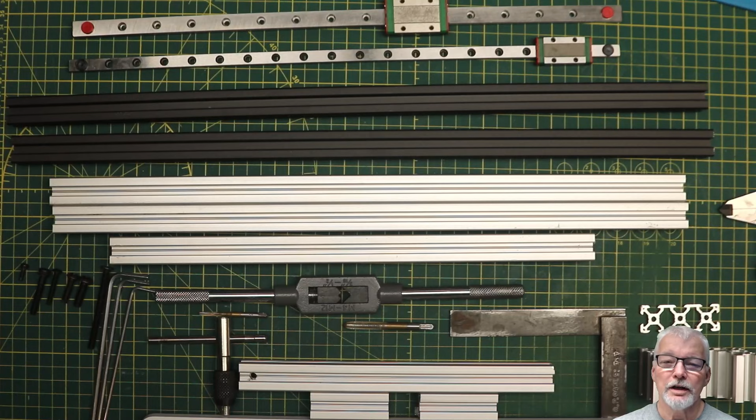So without further ado, let's switch to the bench and have a look at some of the components and some of the tools we're going to need to get that done. What we have up at the top here is an MGN 12 linear rail. We have an MGN 9 linear rail. The MGN 12s, these ones here, are used for the x-axis only. Everywhere else on the z and the y-axis uses MGN 9s.

Now that's great, and the reason they picked MGN 9s is when you put them on a 2020 extrusion with the carriage, it does not exceed the thickness of the extrusion, which means that you can put covers onto the outside of the printer and the rails will not rub against them. If you use MGN 12s, it would. All of the Voron 3D printed parts are designed around using MGN 9s.

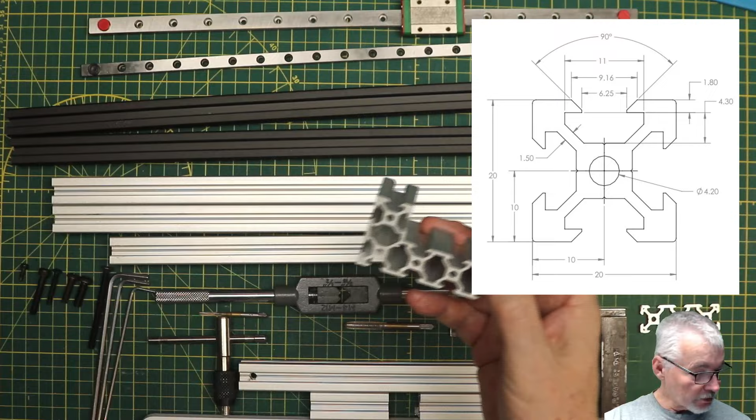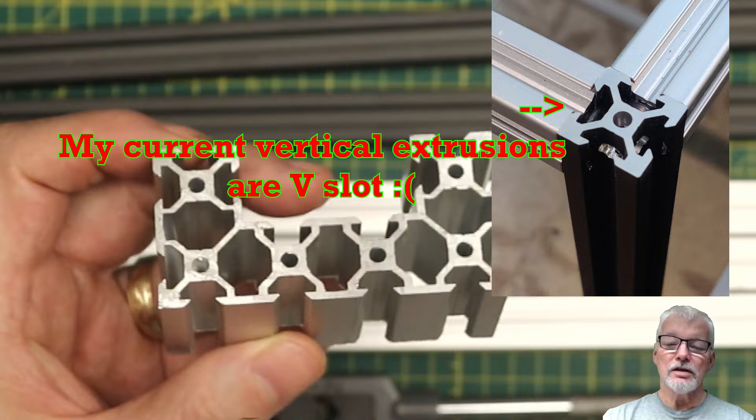Now I've discovered that my vertical rails are actually V rails, and if I show you an example here of what a V rail looks like, you can see here that there are slopes. There's 45. If you go down on that one and back up on this one, it's a 90-degree slope, and the width at the top of this slope is actually 9.2 millimeters, slightly wider than what the MGN 9 rail is.

Now this is an 80 by 40 C section of extrusion. I've used these in the past for my CNC machine. Can't use the MGN 9s easily on the V sections. Now some people have used 3D printed inserts to sit under there, which takes up the V shape, and I might try that. I'm not completely against getting some proper extrusions.

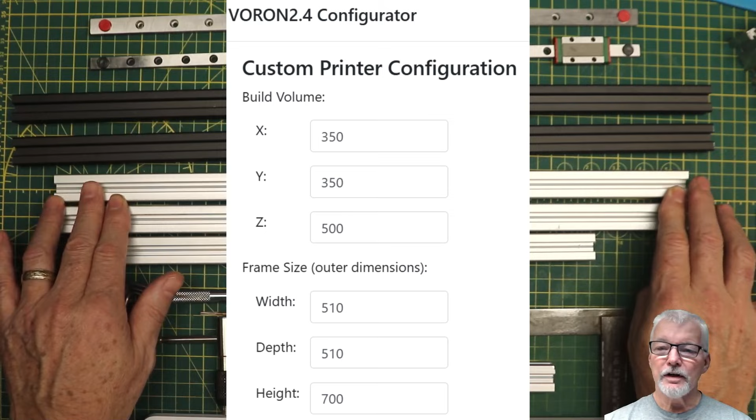So the first thing you've got to do is decide what size frame you're going to work with, and that's where you go through the configurator. I showed you the configurator in the previous video. One of the things that comes out of it is the length of each of the sections you need. Now I've already cut all the pieces from the scraps that I had, but I wanted to go through some of the important aspects of what you've got to do when you cut these, and also what can be different about different extrusions.

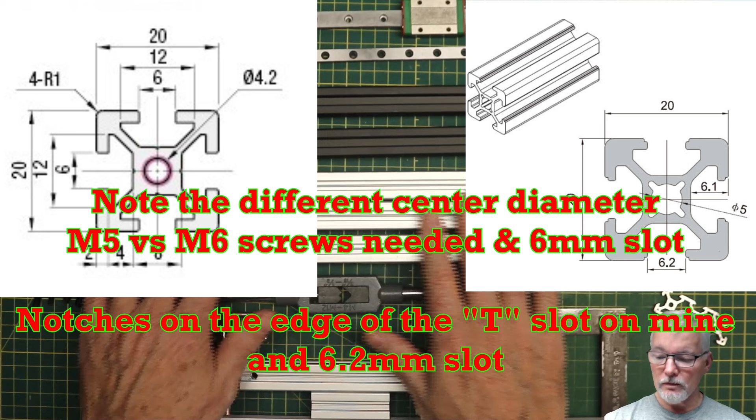None of the ones I have here are Misumi extrusions. There you go, I remember the name. They're close, they're all 20 by 20 T-slot extrusions, but the Misumi ones have a slightly different profile about them.

Now if we go back to these other extrusions, here's the V wheel one, and you can see here the gap between them is 6.25. That's no big deal because the T-nuts that go in will go well into the slot and they'll still clamp up well. But the gap across the top, sorry, I said 9.2 before, I meant 9.16. Your linear rail is 9 millimeters wide, so it's going to be sitting just a fraction into there, and it's going to make it very difficult to stop it from twisting into aligning with one of those slopes.

So by 3D printing something that could insert in there, in my case, I might be able to avoid that, and it's worth giving it a shot because I've already got them. Anyway, so that's a V slot that's used for a lot of the Chinese import 3D printers. It's used a lot in some of the lower cost CNC machines too. In fact, the two that I built years ago both use V wheels. The extrusions are much bigger, but they're still based on the 2020 format.

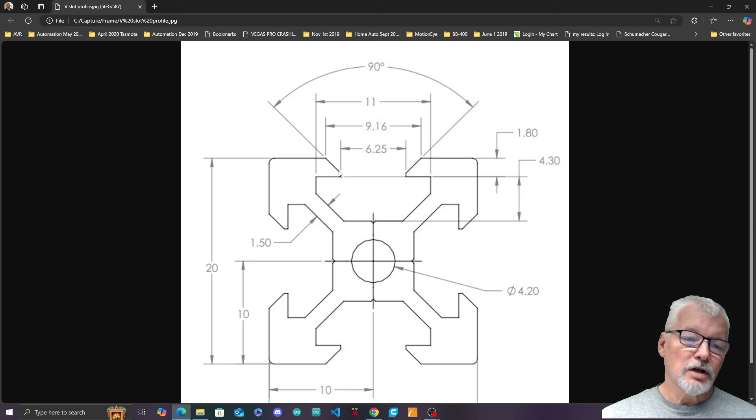So like I showed you before with that 8040 C section, my big 1.5 meter by 1.5 meter CNC actually uses that C section for its axis. So yeah, this is why the worst kind of extrusion you can use is this V wheel kind. Now, one of the other ones that is very common, if you get standard extrusions, is this one.

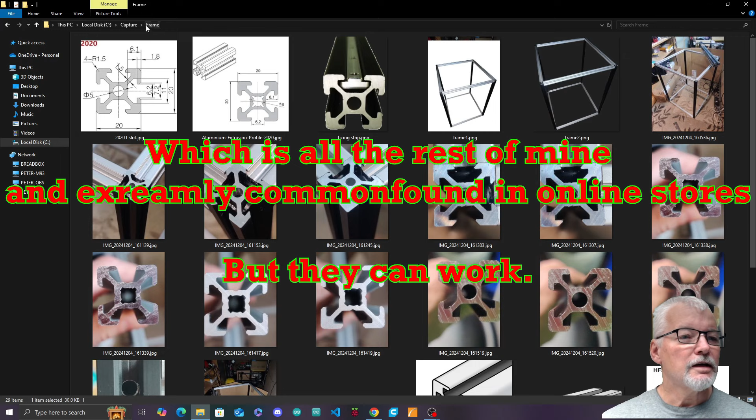And if you look at this one, you'll see that it's almost perfect, almost, but the gap in between the two is 6.2 millimeters. As I mentioned before, the gap is actually okay at 6.2, but there's a little half millimeter by half millimeter notch. Not sure why it's there, but it is on each side of the slots. So that means it's 7.2.

So your 9 millimeter rail will go in there, but it'll only have 1 millimeter on either side. As long as you align it properly, that will be perfectly adequate and clamped down. The other thing you have to notice is that the internal hole diameter is actually 5 millimeters instead of 4.2. So you can't use that for an M5 screw. You'll have to go up to an M6 screw. And that's perfectly fine too. That's a very, very trivial variation in this situation.

Now, I have a lot of this extrusion. In fact, all of the horizontal frames on my build are going to be made out of these, and the flying gantry is also going to be made out of these. So I'll make slight adjustments for the holes by tapping them bigger. When it comes to the flying gantry, it really doesn't make any difference.

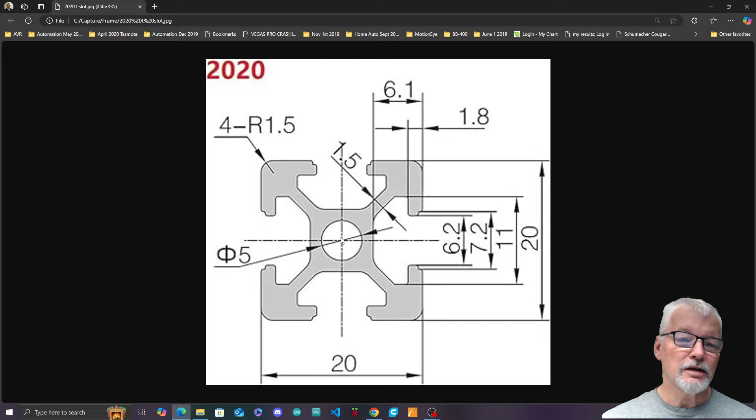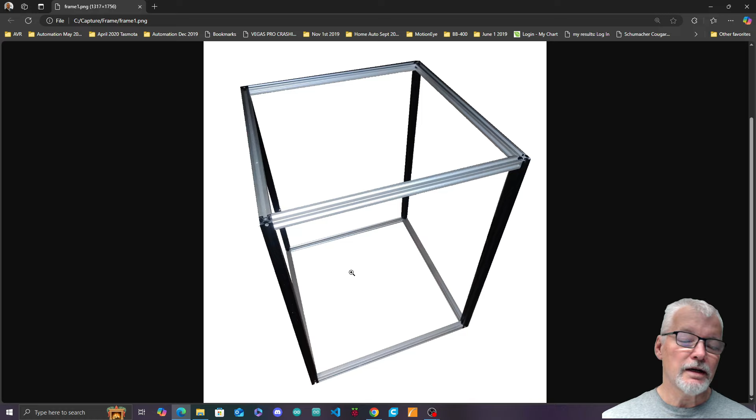These top ones, you don't actually put any linear rails on them at all, nor the bottom ones. You only put T-nuts in and attach them. So it really makes no difference there. The only real difference that would be made is on the flying gantry, where you will have the linear rails for the X and Y fastened. On this, you're going to have linear rails fastened on the inside edges of these vertical black rails.

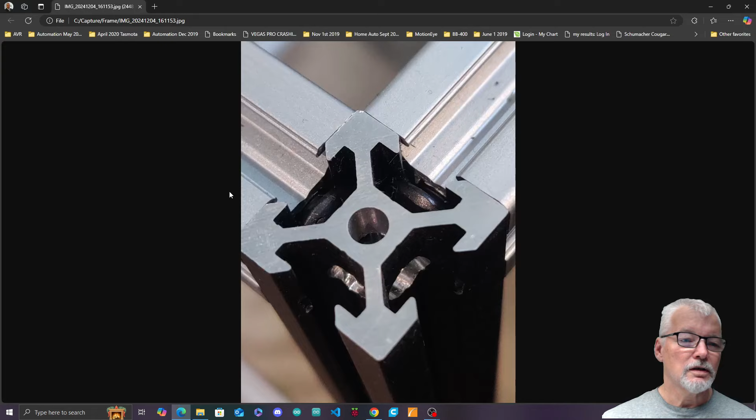So taking a look at what we have to achieve when we're building this, there's going to be some cutting and some drilling. So what we have to do for our joints is here. I've taken a close-up picture so you can see where I've drilled through the side 10 millimeters down right through on the inner section, and same on the other direction, because when we join these pieces of extrusion together, we're going to put a button head screw in there, and we're going to reach through these holes with an Allen key to tighten it down.

So it's going to be gripping on the outside edge of the T-slots and pull that extrusion in really, really tight. And it makes for a very, very tight joint. The extrusions that I have to tap are yet again slightly different. So you can see it's the 20 across, 6.2 millimeter gap. It's got those little half millimeter by half millimeter notches in it.

But what's different on this one is it has this weird shape extruded down the middle. I am not sure why it's there in that shape, but the basic circle is still here, and you can still tap it with an M6 tap so that you can screw it in, and it still gives you a very, very tight fit. By the time the tap's done, it's eaten quite a way into these little notches that are around it as well. So not a big deal, it's just yet a different profile.

When you look at these to join them, these are the ones I just showed you with the little bit of a weird inside hole. They still work perfectly well. You can see this is an example where I didn't quite join them together properly. I need to slacken that Allen screw off and drop it down a little bit.

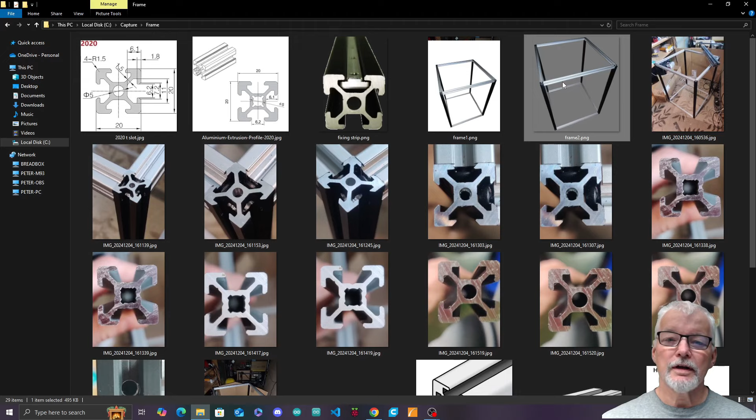Now there's some critical aspects of this frame that you need to know about. So let me just pick up a picture here. There's going to be linear rail running down this edge and this edge. These two extrusions have to be perfectly parallel to each other, because remember with the Voron 2, the bed stays fixed at the bottom, and the head is the piece that moves up and down inside the printer frame.

So these two right hand side vertical frame pieces have to be perfectly parallel to each other. These left two have to be perfectly parallel to each other, and then the left two to the right two have to also be perfectly parallel to each other, because the flying gantry is going to be suspended in between them, and the last thing you want is to be twisting that gantry or making it distort in some way as it moves up and down. So lots of perfect alignment is needed.

The other part is that on the top, the cutting of these is not hugely critical, but they should be cut as accurately as possible.

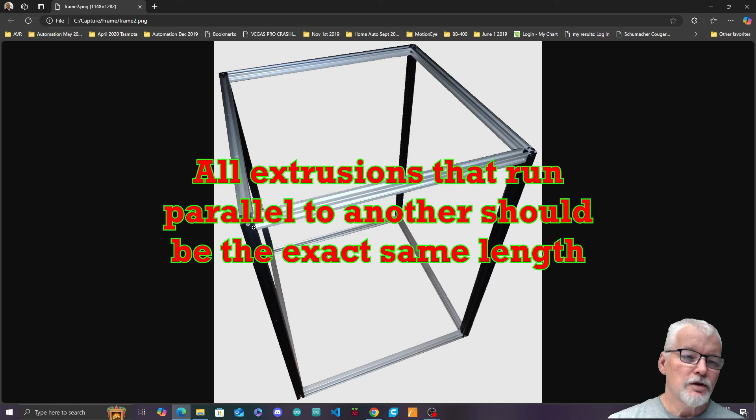I mean, mine are exactly 700 millimeters, that's how they came, but if you had some that were meant to be, I think 530 is what you use, or 550, for a 350 by 350 by 340 frame. But if the length of this is only 695, that's not going to be a big issue, because there is a bit of leniency in the length, and it's not going to affect anything terribly. But these ones here, they need to be pretty close to what is called for in the bill of materials. But if they're a millimeter off, it's really not going to make any difference.

But what is important and critical is that this one and this one and this one and this one, so the ones that run from left to right on the top of the frame and the bottom, have to be identical length. The length could vary a little bit from what you desire, but the important bit is they all have to be identical. So one thought is to set up a jig and cut them all together. There are plenty of videos on YouTube about cutting the frame pieces.

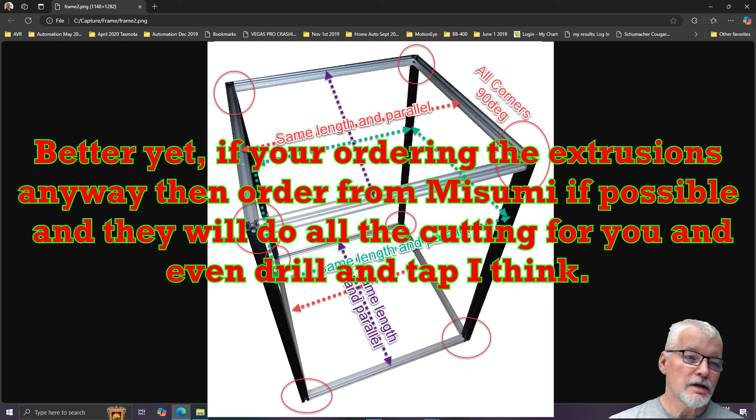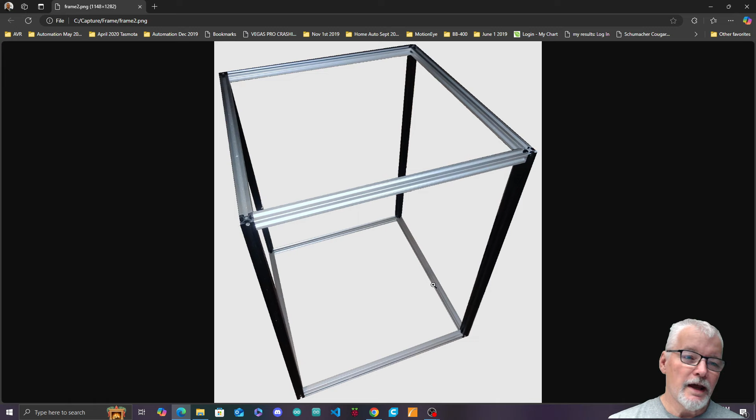Now also, these left and right running front to back frame pieces, and the top two running front to back, have to also be identical in length. The frame, strictly speaking, for the 350 by 350 is an actual perfect square. But if it isn't a perfect square, as long as these are parallel and identical lengths, and these are parallel and identical lengths, top and bottom, left and right, then your frame is going to end up being completely square.

Now I will, a little bit later in the video, show you how to measure whether you are true square. You can use a machinist square like this, and when you have, I've just got some pieces here, when you have them screwed together, you could use the machinist square to check that they are perfectly square or not. Now this one, I'm just holding it together tightly, but I can see that it is actually very, very square. These were cut on my compound miter saw outside, and they seem to be fitting together very nicely.

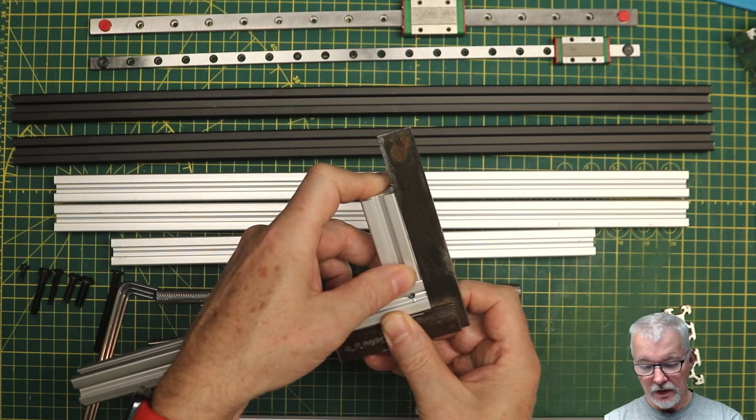But when you're putting this together, if you've got slightly different lengths anywhere, one might pull a piece out of alignment slightly when you're screwing it together. So you need to be aware of that. So measure with at least a machinist square, or I have a slightly cheaper version which you would typically use for woodwork and framing, carpentry and things. This would also do. Just make sure it is truly square. Otherwise you'll be chasing your tail trying to line things up.

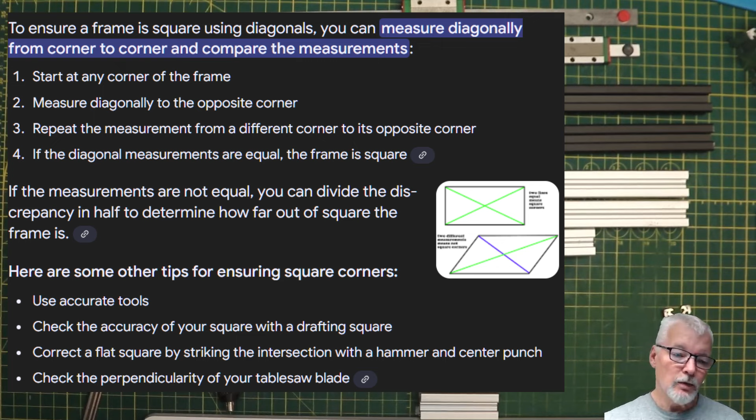But another way of doing it is, once the frame is actually assembled, and I'll do a demonstration later in the video, if you take your frame and you run a tape measure from corner to corner, and pay attention to the point on the tape measure that you're measuring and where you're hooking onto. Take a measurement. Let's just assume that it's 50 inches. So I'm just randomly picking a side. This should also read the exact same length.

If it isn't, and assuming that your extrusions are the exact same length, so in this case these are 700 millimeters, then if the distance is different, it means that the frame is skewed slightly, and you need to correct that, because if you don't, your head is going to be slowly drifting off in the direction of the skew as it raises up from the bed, and that's going to give you a potentially crooked print. Now if it's only a fraction of a millimeter out, it's probably not going to make a huge difference.

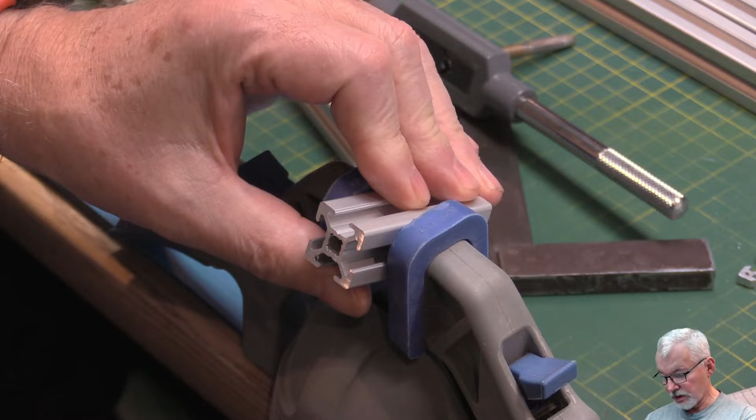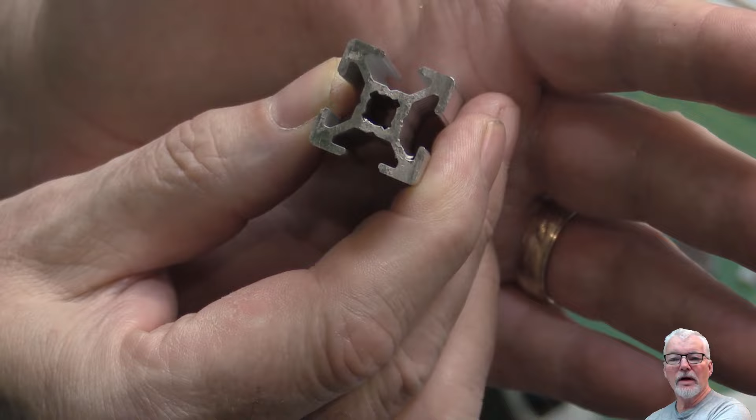Okay, so here on the bench we have just an offcut of an extrusion. It's the same as I'm using for all of my horizontal pieces in my frame. As you can see, it's got one of those square holes in the end. So what we need for this, because this is basically a 5mm hole, albeit it's got a few bits of square in it. See, it's basically a circle with little square bits tabbed out of the, I say corners, but it's a circle, so there are no real corners. But you get my drift. You can see from that picture exactly what we're going to be tapping into.

So let's put this back in the vise and we will tap it. So this is the tap we're going to use. This is what they look like. This is a tap holder and this is the tap. This is very hard, so you need to be careful. If you do use a power drill to do your tapping, you need to go carefully.

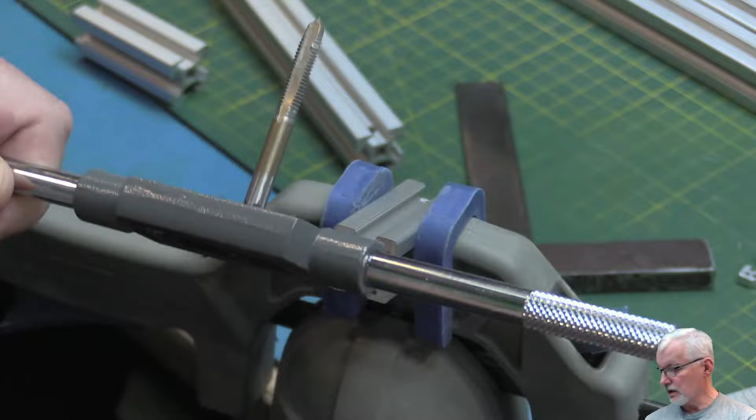Now, one of the things that is recommended when you do this is a little bit of lubricant. Now, I happen to have some cutting fluid, which I will use, but if you don't have any of this, because you're going by hand mostly and you're not doing a lot of it, a little bit of WD-40 would also do the trick. So all you need to do is just put a little bit of it on the tap. That's probably more than enough. And you can see that it's a little bit lubricated on one side, but once we start tapping, that's going to get in the hole and spread around.

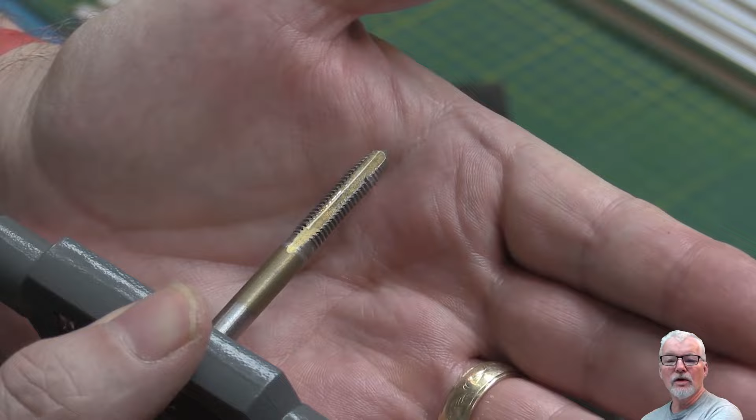Now the trick with the tapping is, hopefully it'll focus again, you need this to be a straight line straight down the tap. So your tap needs to be aligned down the center if you want it to go square. Now it will fairly well self-align as you go, and then once you have this in place, you just need to start rotating. It will start to bite and you don't need to push too hard. So I'm going to line this up in both planes so that it's going in square, and then you just start rotating.

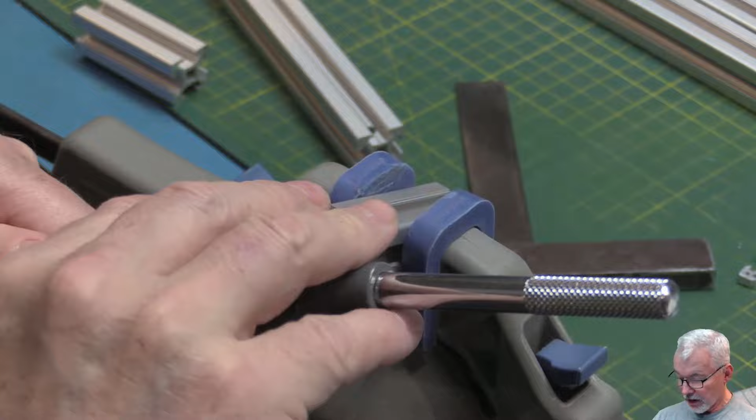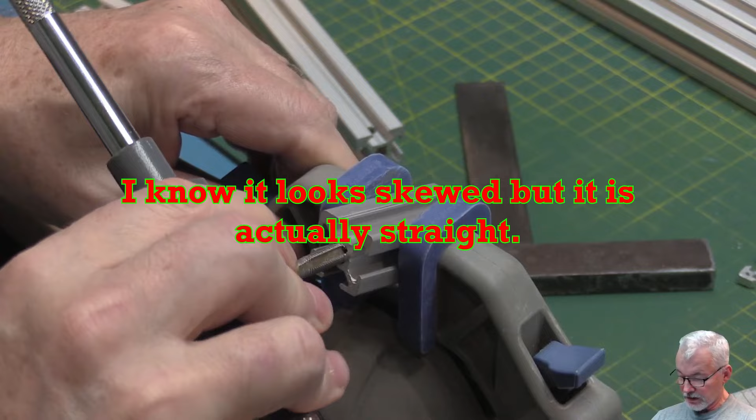It will start to grip it itself as you're going in. You may not feel it initially, but it will start to bite down. And usually the trick when you're tapping any metal is you go in a few turns and then you come back out a little bit, just a quarter of a turn. Then you wind back in again, go in a few turns and back it out. And the idea of this is to get the swarf that's being cut inside here loose, and as you can see, there are grooves in here where it can collect.

So I'll quickly just wind through this. It's a 90-degree end, so you can just spin down on this. Now we'll show you another shot. I'll do another piece, and I'll use an electric drill. In this case, because there is a lot of clearance, you can do it. So let's just get that. That's as far as the tap will go. I've run out of threads here. And that's more than enough anyway that we need. You can see it very easily comes back out again.

It's actually made the threads quite nice. And if I take an M6 bolt, you see it'll now thread in very nicely, and it's not too wobbly and it gets a good grip. Okay, now that's doing it with a hand tap. The same principle applies if you're using M4s, M5s, M6s, M3s.

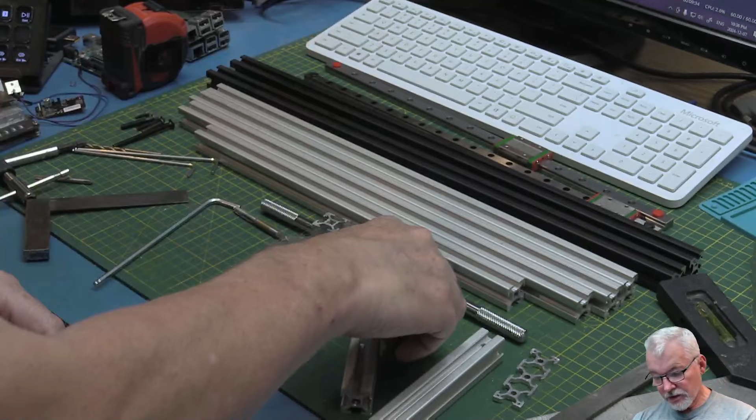So what you want to do is, in your horizontal pieces, you want to just screw into it. Now you want to put it almost all the way in. You can see there's a lot of thread to get a good grip in here. So screw it quite a way down. You want it to be able to fit in there and not have a big gap. So we'll screw it down a bit more, just minimizing what you need to do to screw it together.

That's a chewed up end, so I'm going to assemble. Actually, that's the end I haven't drilled either. So here's the end I've drilled. So we'll put that in. You can see it's still a bit loose, but if we take our Allen key, we can go right through. All right, and we can snug that up.

Now what you want to do is probably have it on a very flat surface. So now you can see I've got that for pushing against, nice straight surface. Push these two pieces together while holding that nice and smooth. Get your Allen key in here and snug it up. So just tighten that up reasonably tight and then you can bring it away. See, I still managed to get that a little bit wrong on here.

Just a little bit proud on this. So what I'll do is I'll slacken that off and try and smooth it up again. Keep it all together. Like that, and now, right, we're much better now. That's nice and smooth now, right? And it's aligned this way. So we'll just nip that up.